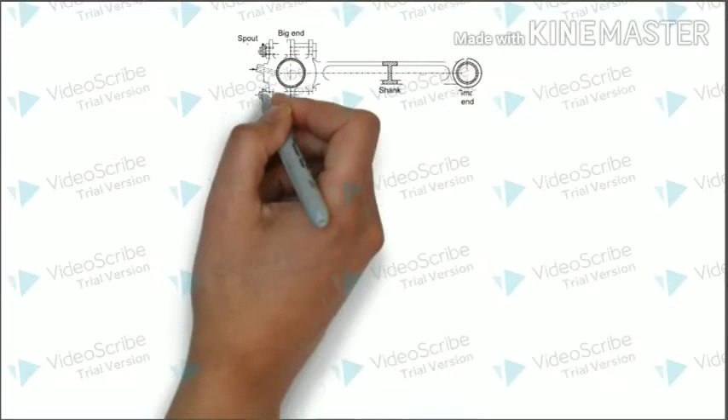As you all know, a connecting rod has mainly 4 different parts. Starting with the shank, which is the length part of a connecting rod, it is actually an I section. It is followed by a big end and small end, as you can see in the figure. The big end is connected using a bolted joint, that is by using a bolt and nut.

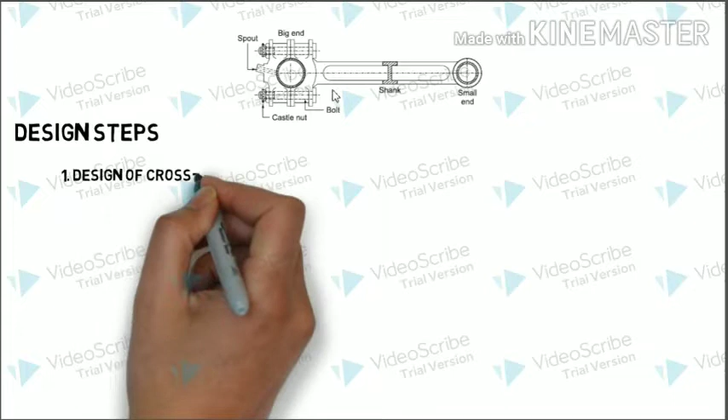The design of this connecting rod mainly comprises 4 different steps. It starts with the design of the cross section, which is actually an I section, also known as shank. Care must be taken that while designing this I section, it is clear from the figure that the I section is not constant - the dimension from top to bottom is not the same. Even though the base dimension is the same, the length-wise or height-wise dimension is different. So we'll be designing the center part, and the other two parts have to be found out.

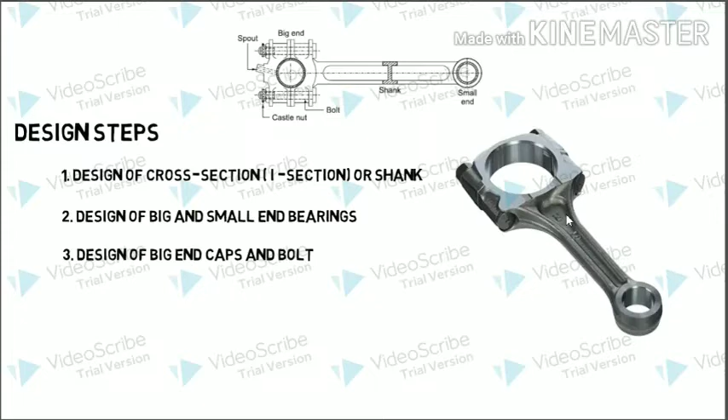Followed by this, we'll be designing the big end and the small end bearing. Once that is finished, we'll go to the design of the big end caps and the bolt, wherein we'll be finding the nominal diameter of the bolt and the thickness of the big end cap.

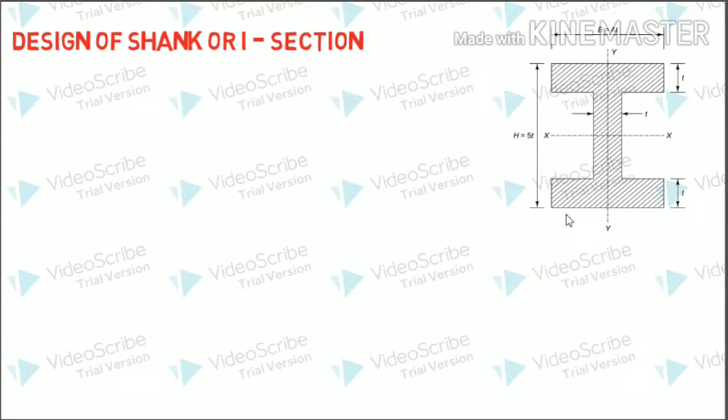One of the main objectives in this section is to determine the thickness of the I section. To determine this thickness, all we need to know is the basic function of a connecting rod, or how the connecting rod transfers the load. It actually connects the piston with the crank. Therefore, the load acting on the piston is transferred to the connecting rod, which is then transferred to the crank. So actually 2 types of loads are acting, one is PS and one is P.

Let us eliminate this PS and consider P, which is the major load acting on the piston due to the power stroke, and that is transferred as PC. From the figure you can see there is a very small angular deviation, phi. Since this angle is very small, you can approximately take PC to be equal to P. That is, the load acting on the connecting rod is nothing but the load acting on the piston.

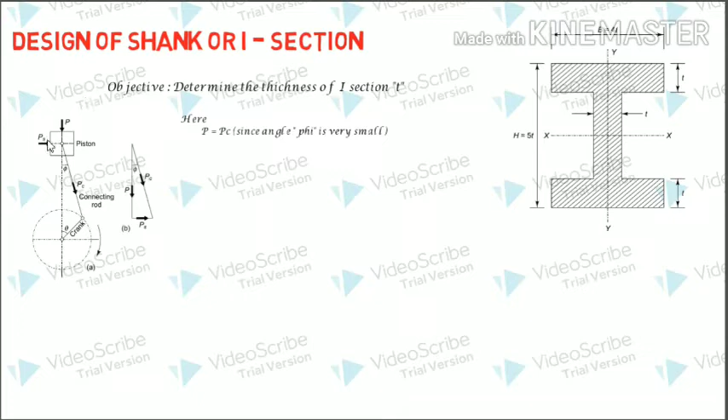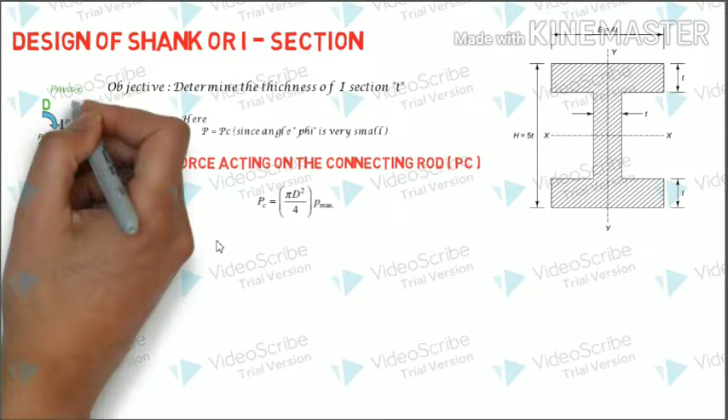It is very easy to find the load acting on the piston rod. Let us begin by finding the force acting on the connecting rod, PC. This PC can be found out by the relation PC equals pi by 4 d square into P max, which is nothing but the cross-sectional area into the pressure, where D is the bore diameter and P max is the pressure acting on the piston. So this equation effectively is pressure into the cross-sectional area, which gives you the force.

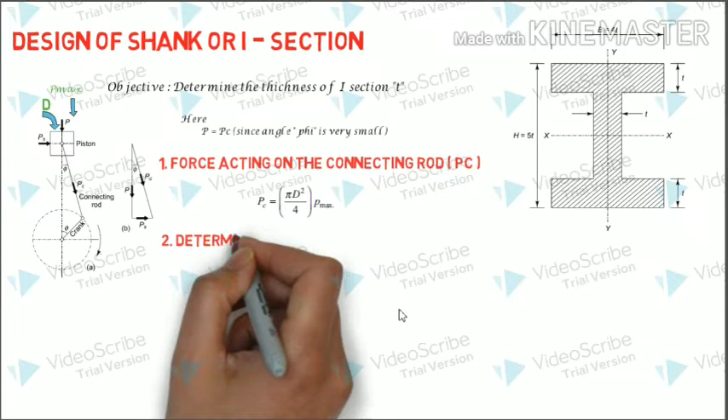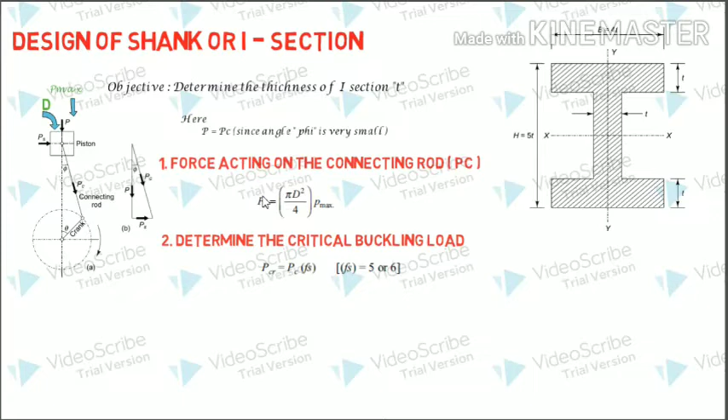Once this force is found, the next step is to find the critical buckling load acting on the piston. To find this critical buckling load, we multiply the load acting on the connecting rod with a factor of safety. The critical PC is multiplied with a factor of safety, normally taken within the range of 5 to 6 - you can take either 5 or 6. So we have found the buckling load for this condition. But there is actually a standard equation for determining this buckling load, called the Rankine's formula.

You might have already learned in mechanics of solids that when a column is subjected to buckling, we'll be using the Rankine's formula. From Rankine's formula, your PCR can be found using this relationship, where A is nothing but the area of this I section, this cross section I section, and that is given by 11t square.

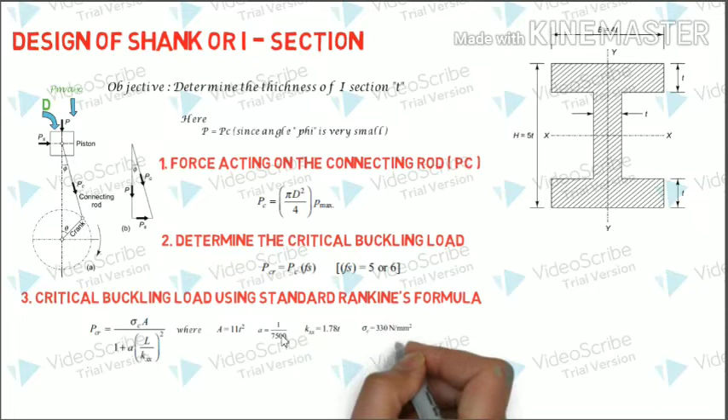The small a is nothing but 1 by 7500, which is the standard value, you can take it as it is. Radius of gyration kxx is nothing but 1.78t, and sigma c value you can take as 330 newton per mm square if it is not given. All these values you will be getting from the PSG data book, page number 7.123.

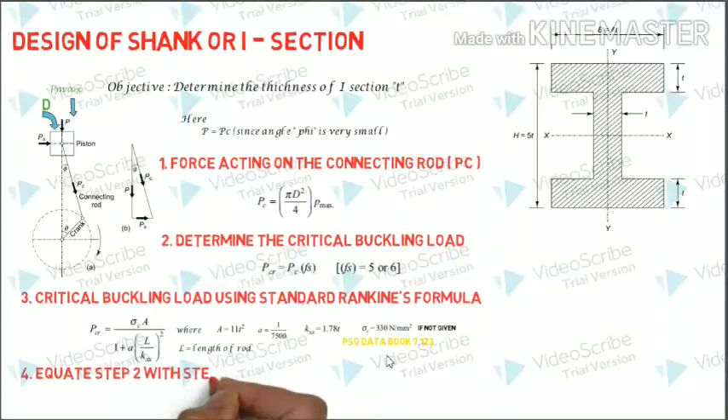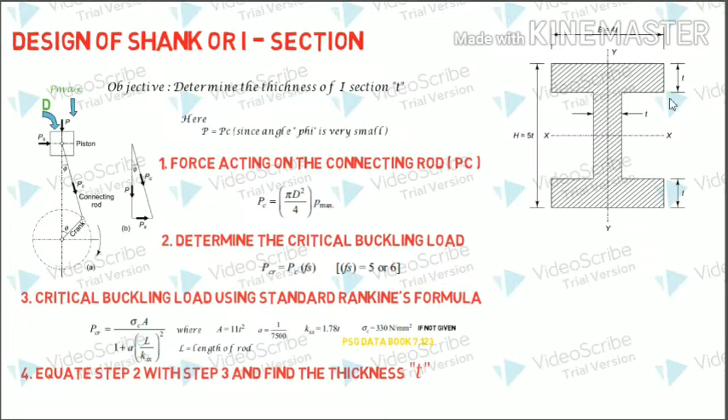Once this is found, you may directly equate step 2 with step 3, since both are PCR, and once you substitute all these values in this equation, you will get all the value in terms of t. So directly you may equate and find the thickness t. Once this t is found, the complete dimension of this I section can be easily found out, because all other dimensions are related to this one.

But always remember, this is actually the center portion, the dimension of the center portion. The remaining two, the portion at the top and the bottom, is pending. So to find the dimension of the base and top portion, let us name these two portions: let the base be h1 and the top portion be h2.

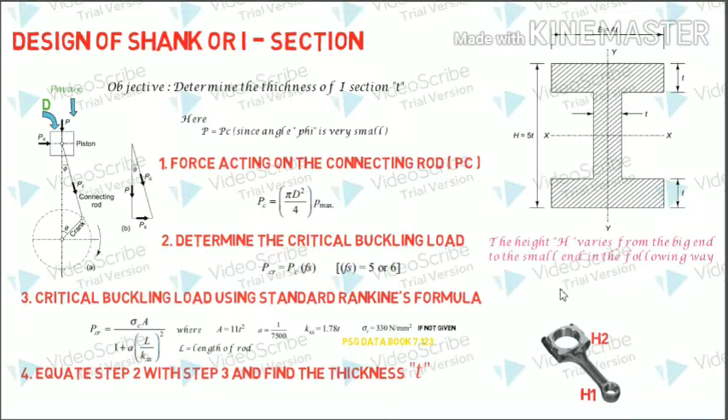So with this, your basic design for the connecting rod is coming to an end. Basic design of the connecting rod is coming to an end. Now let us move on to the design of the big end and the small end bearing.

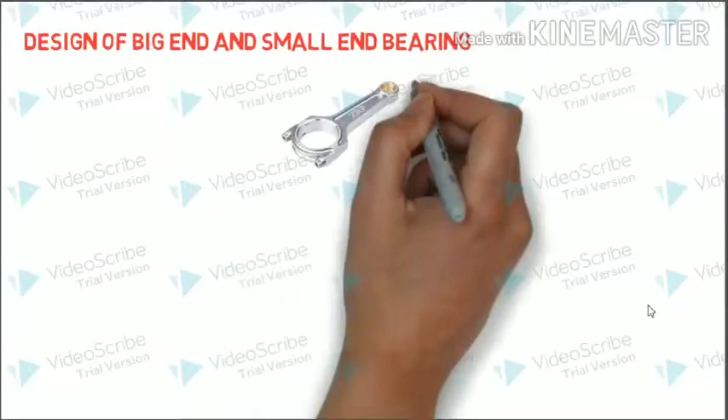So here all you have to do is to find the dimension of the big end and the small end bearing. These bearings are actually something that is kept inside this big end and small end, right? So it is effectively a simple hollow cylindrical section. Let us enlarge this view.

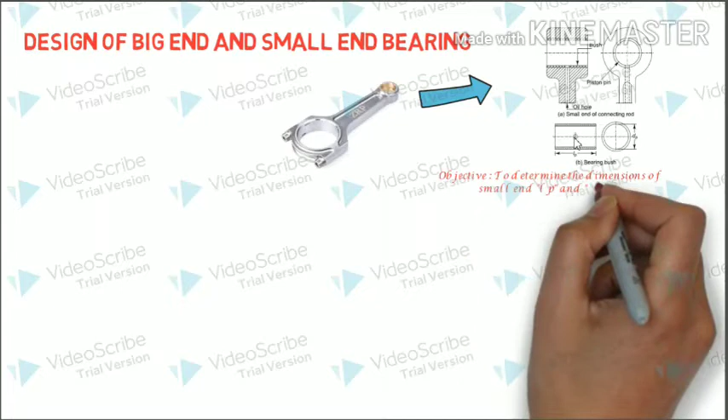So effectively the objective here is to determine the dimensions of small end, which is LP, and the diameter. Now this subscript P is used because this portion is attached to the piston pin. So to denote piston, this subscript P is used.

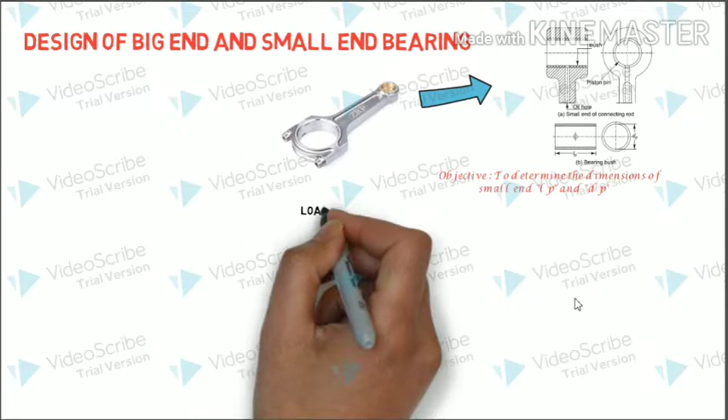Now the concept behind this is that the load acting on the piston is actually transferred to the connecting rod. The same load is transferred to the big end and small end bearing as well. The load acting on the small end bearing can be found out using the equation PC is equal to dp into LP into PBP.

But this dp into LP will give you the area, the projected area, which is the effective area, and that is multiplied with the allowable bearing pressure PB. This allowable bearing pressure you can take in between 10 to 12.5. This value will not be given, you have to keep it in mind, the bearing pressure is 10 to 12.5.

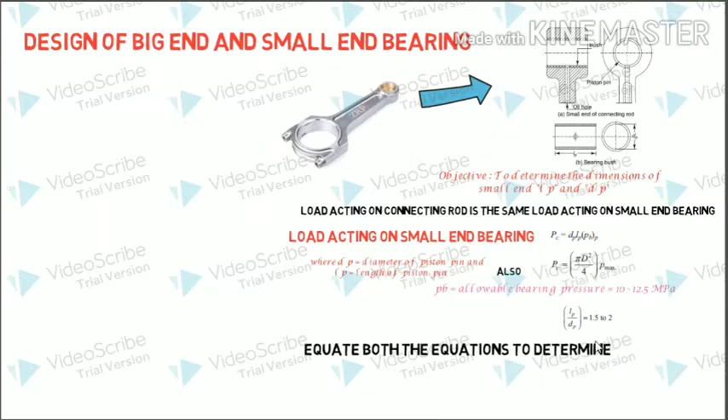Now to find these two, let us equate this value with the standard PC, or the load acting on the connecting rod, which we have already found out. The load acting on the connecting rod is nothing but pi by 4 d square into P max. To find this, you also need a relationship, and the relationship is the ratio of length to diameter can be taken anywhere in between 1.5 to 2. So using these three equations, you may equate and determine the value of LP and DP.

Okay, now the same concept can be applied for determination of the big end bearing as well. All the same concepts applied similarly to this one.

The only thing is that the denotation will be different, that is LC and DC, because it is connected to the crankshaft or the crank pin. Now the load acting on the big end bearing is nothing but DC into LC into PBC, where DC into LC is the projected area of the bearing, multiplied with the allowable bearing pressure acting on the crank. The allowable bearing pressure is taken somewhere between 5 to 10, so you may take 10 megapascal, which is applicable for both cases.

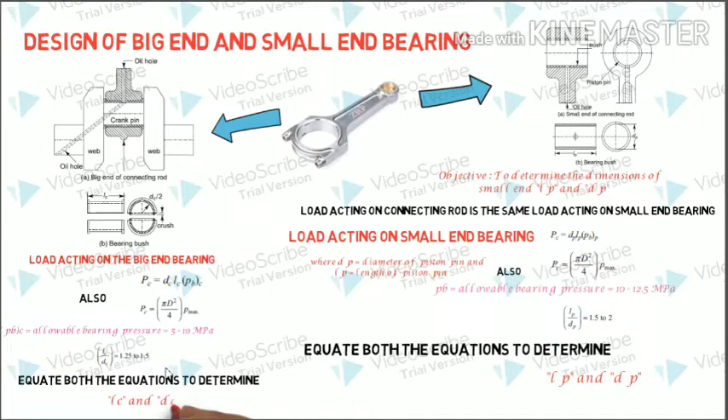And L by D ratio here ranges between 1.25 to 1.5, so you can take anywhere in between, better take 1.5. By equating in the similar way you can find the dimensions, length and diameter. So we have finished that part.

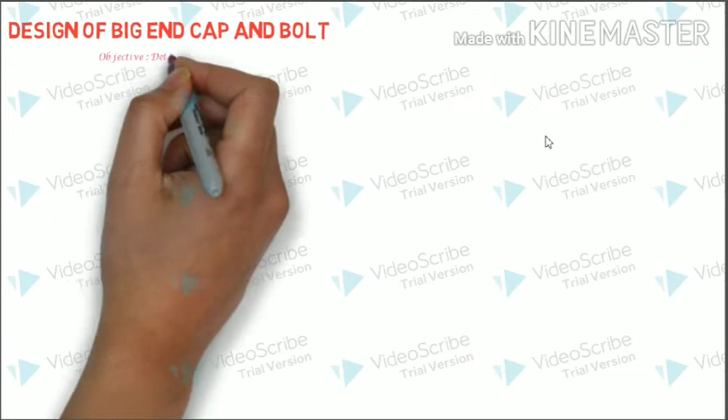Now let us move on to the design of the big end cap and the bolt. The objective here is to determine the nominal diameter of the bolt and the thickness of the cap. So actually designing the bolt means finding the diameter.

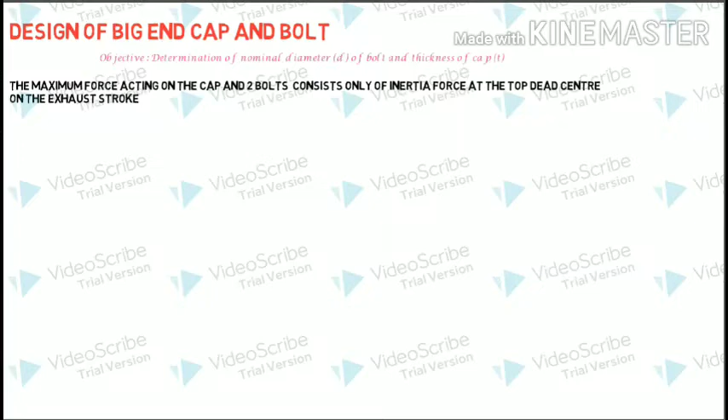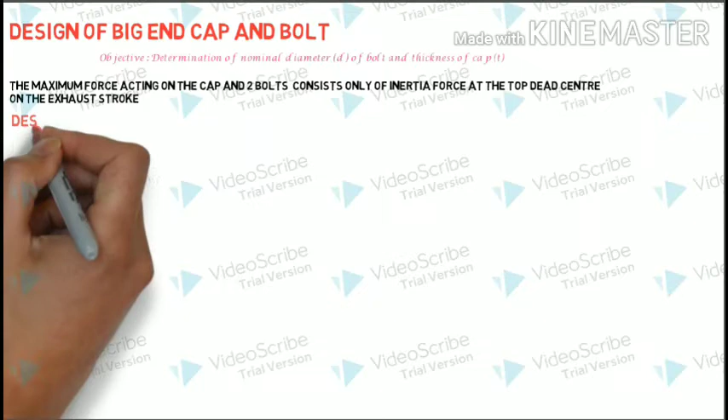The maximum force acting on the cap and bolt is actually the inertia force acting on the piston when it reaches the top dead center during the exhaust stroke; this is the only force acting on the cap and the bolt. Let us move on to the design of this bolt first. Let us analyze the bolt first, and after that we will deal with the cap.

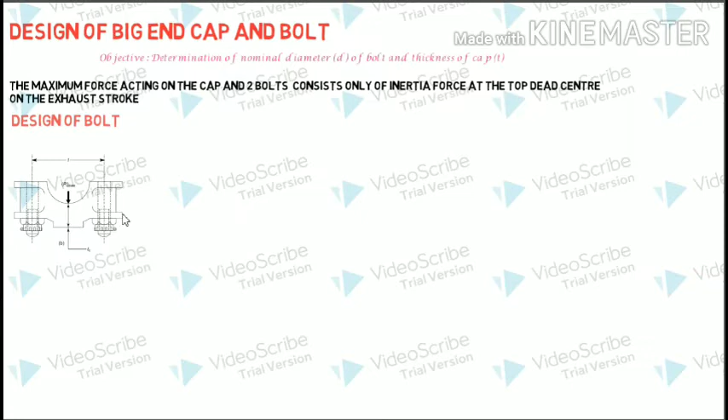So this is how the arrangement looks like. And the big end part will look something like this, having a cap followed by two bolts. So we'll be designing the bolt first, since as spoken, the main force acting over this is the inertia force.

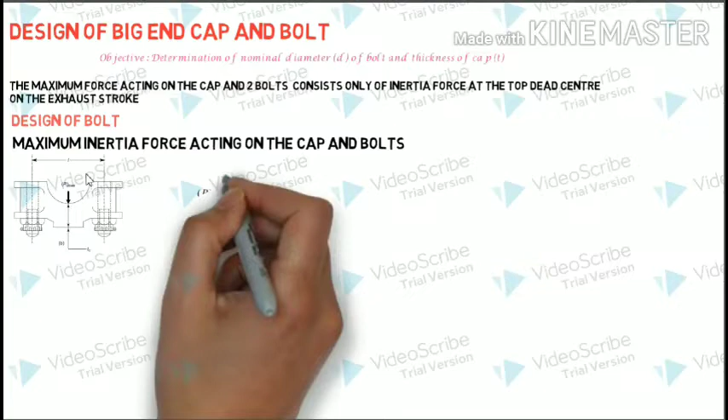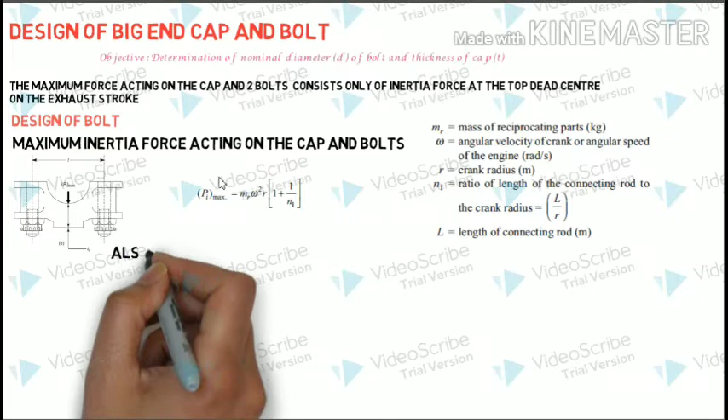This inertia force acting on the cap and the bolt is given by a standard equation: pi max is equal to mr omega square r into 1 plus 1 by n1. This equation is not there in the data book, so you have to learn it. Here mr is the mass of the reciprocating parts which will be given, omega is the angular velocity which can be found out, r is the crank radius which will be given, and n1 is the ratio of the length of the connecting rod to the crank radius.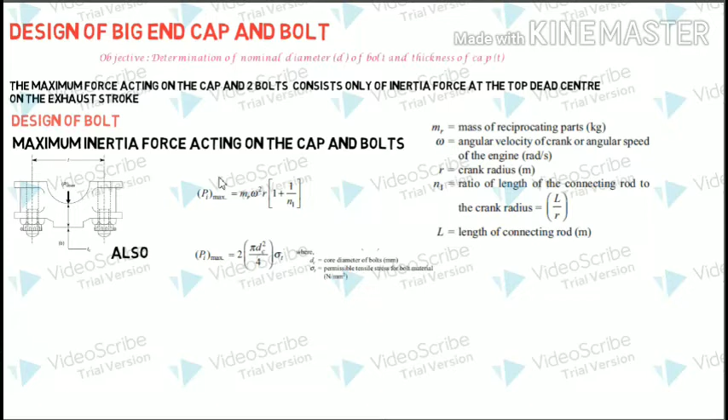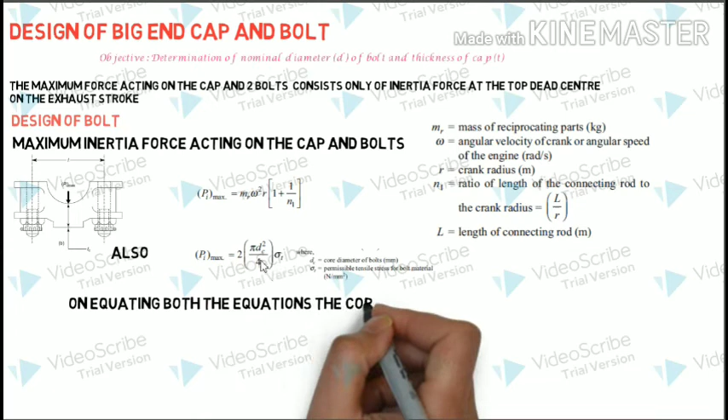Now since pi max force is acting on this base part, this complete force is actually withstood or resisted by the bolt. Therefore the pi max force resisted by the bolt is given by pi max is equal to 2 times pi by 4 dc square into sigma t. The 2 is coming because there are two bolts withstanding this, and sigma t is the permissible tensile stress of the bolt material, which is a material property.

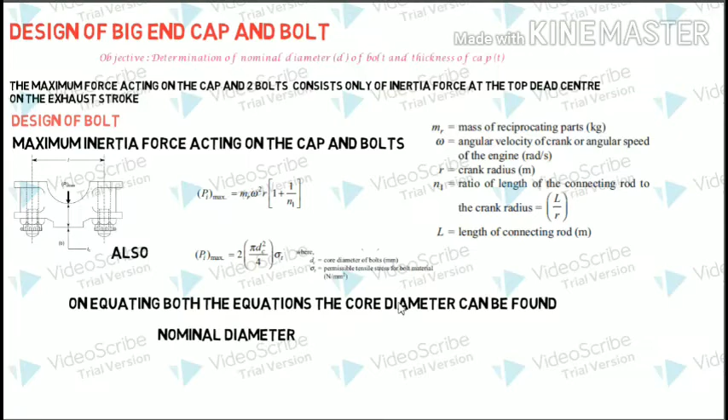So on equating these two equations for pi max, we can get the core diameter dc. Once this core diameter is obtained, it is very easy to find the nominal diameter using the relationship d is equal to dc divided by 0.8. So it is as simple as that. All you have to do is remember these two equations.

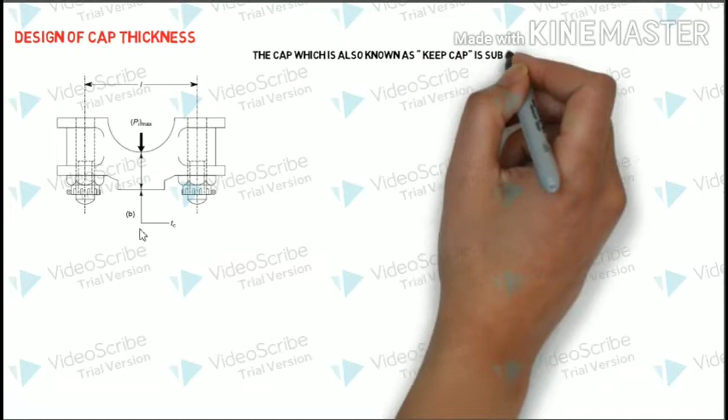Now let us move on to the design of the cap thickness, using the same figure. The TC over here is the cap thickness, and the same pi max pressure is acting over here.

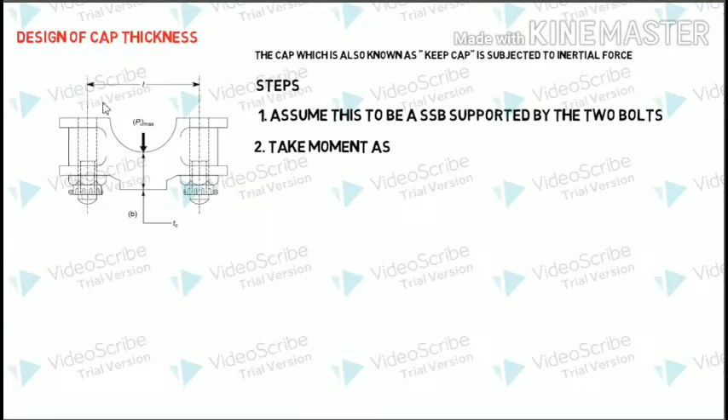Now to determine this, let us assume this complete setup to be a simply supported beam supported using two bolts. A peculiar shaped beam is there, and pi max load is acting at the center, and the distance between the two bolt centers, let it be L.

So the maximum moment acting on this can be obtained using the relationship mb is equal to pi max into L divided by 6, where pi max is the maximum inertial force acting at the center, which you can find out, and L is the span or length as shown in the figure. To find this length, you have to sum this length with the extra length plus half the diameter of the bolt.

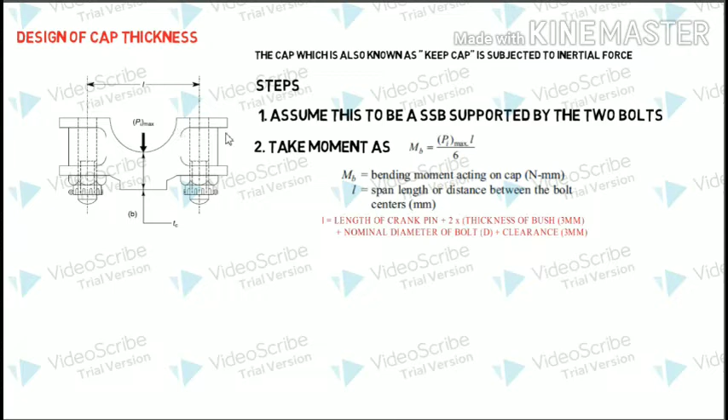So it is given here that L is equal to the length of the crank pin, followed by 2 times the thickness of the bush, approximately 3 mm, plus the nominal diameter of the bolt—that is half diameter on each side, giving the nominal diameter—plus a clearance value of 3 mm.

Okay, now once this is obtained, we can determine the thickness using the standard relationship for the permissible bending stress. Since it is a bending stress, we'll use the standard equation: bending stress equals mb divided by I into y, where mb is the maximum moment acting on the beam, and I is the moment of inertia of the I section.

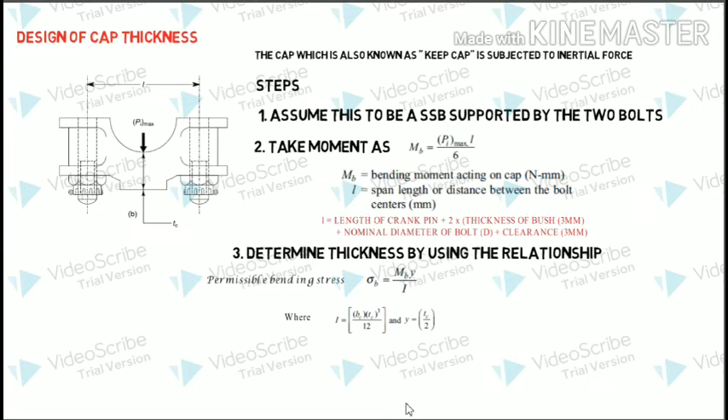The moment of inertia of the section, and y is the distance from the neutral axis of the section. So I is nothing but BC into TC cube by 12, where BC is the width, not shown here, and TC is the thickness which is to be found out. And y is equal to TC by 2.

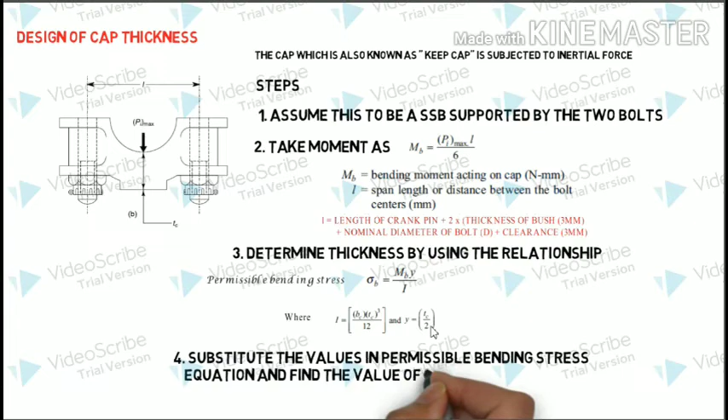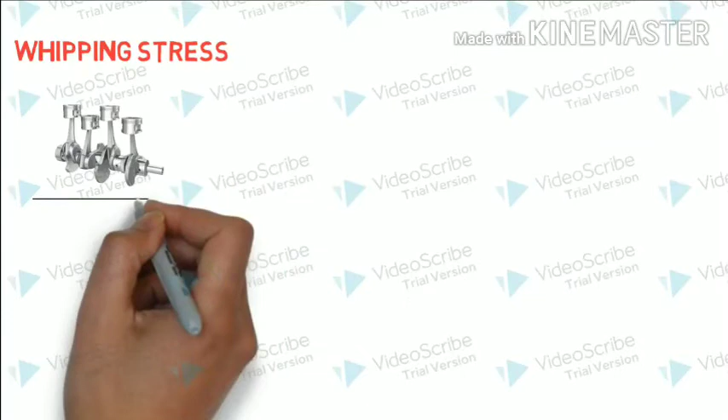So substitute all these values in the equation, and on equating both the equations, you will get the thickness. So with this, the basic design procedure is coming to an end. Now let us find out how to find the whipping stress acting on a connecting rod.

So what exactly is this whipping? To understand this, let us see the working of this connecting rod. One part of this is connected to the piston, and the second part is connected to the crankshaft. So the motion of the connecting rod is something like this: the part which is connected to the piston will be executing a reciprocating motion, whereas the part which is connected to the crankshaft will be executing a circular motion or a pure rotatory motion.

And because of this, the parts intermediate to this connecting rod will be executing an elliptical path, and due to this difference in motion, it produces a lateral oscillation. This oscillation induces an inertial force, and this causes bending of the connecting rod, and this bending is actually called whipping. The stress associated with this whipping is called whipping stress.

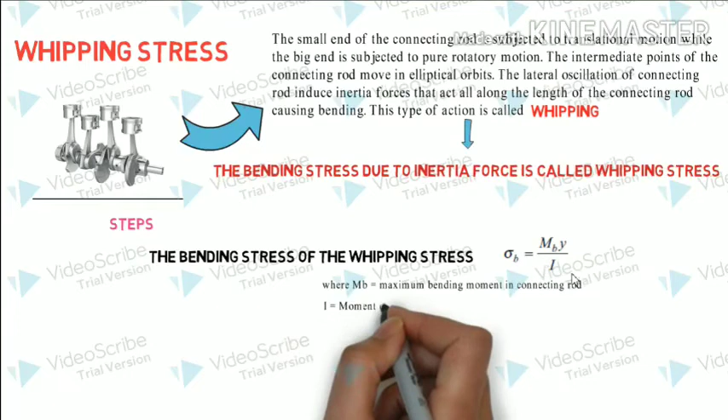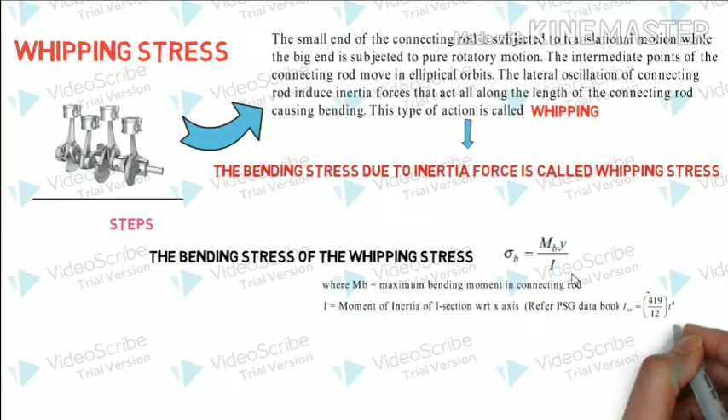So to determine this whipping stress, since it is a bending stress, let us use the basic or fundamental equation: sigma b equals mb by I into y, where mb is the maximum bending moment acting on the connecting rod, and I is the moment of inertia of the I section with respect to the x-axis. For this you can refer the PSG data book. The value is 419 by 12 into t raised to 4 — it is actually the moment of inertia of the I section.

Since we are dealing with the shank portion, and y is the distance from the neutral axis, this also you can get from the data book. So this will be complete.

The bending stress or the whipping stress can be found out only if we get the maximum bending moment. And to get the maximum bending moment, we have a standard equation given by m1 omega square r into L square by 9 root 3.

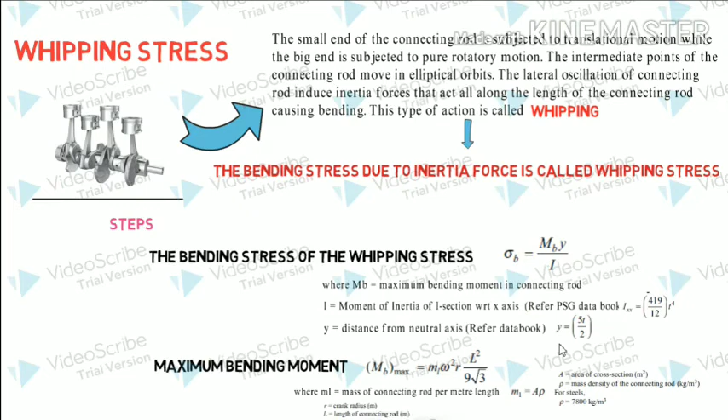This is a standard equation, and you have to learn it by heart. m1 is the mass of the connecting rod per meter length, obtained by multiplying area with density. Area is 11 t square, and rho is the density, taken as 7800 kilogram per meter cube since we are considering steel. Finally, r is the radius of the crank, and L is the length of the connecting rod.

So with this, on substituting all these values, you will get the maximum bending moment, and on substituting these values in the bending stress equation, you can get the whipping stress value. So with this, the complete connecting rod design is coming to an end.

This is it. You have to do all these basic 4 steps plus whipping stress. Once you complete all these 5 steps only, the complete connecting rod procedure is over. It can be given even as a 20-mark question, or each part can be given as a separate portion to solve.

This complete procedure is taken from the Design of Machine Elements textbook by VB Bhandari. There will be different procedures depending upon the data book, but most of the equations are not there in the data book, so better follow this procedure.